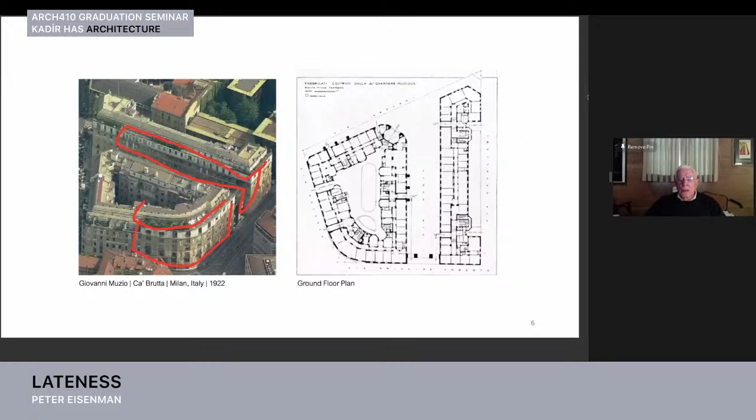Next, please. And here we can see it in context. It's really interesting - it is a perimeter block building. This is the part that Muzio did, and then he did across the street this rectilinear block. So we get a really interesting play between the rounded corner and the square corner, between a perimeter block and a linear block like the Uffizi in Florence. So two typologies on the facade, two typologies on the interior, and there is a really interesting play between these typologies and what I would call lateness today.

Next, please. So we started with a perimeter block.

This was the actual block that we had. We had a certain limitation in terms of height, and a certain limitation at the corner. We had to keep a building that was historically marked.

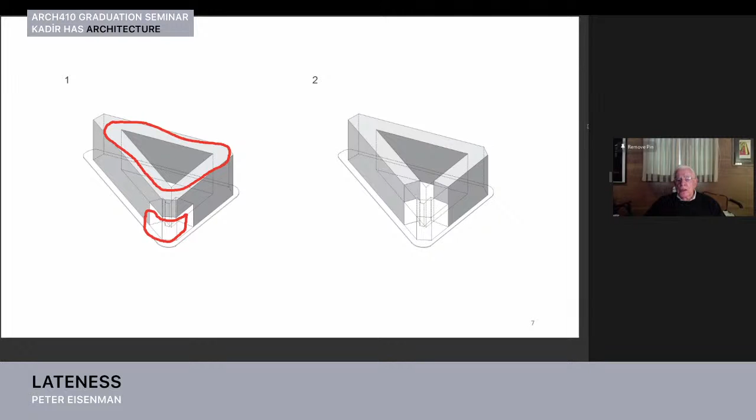This was the desired density that we had. The trouble is that we couldn't build this density because of certain zoning restrictions. So you will see how much we lost from this perimeter block, which I think is really interesting to see, how our project takes its shape from the existing zoning.

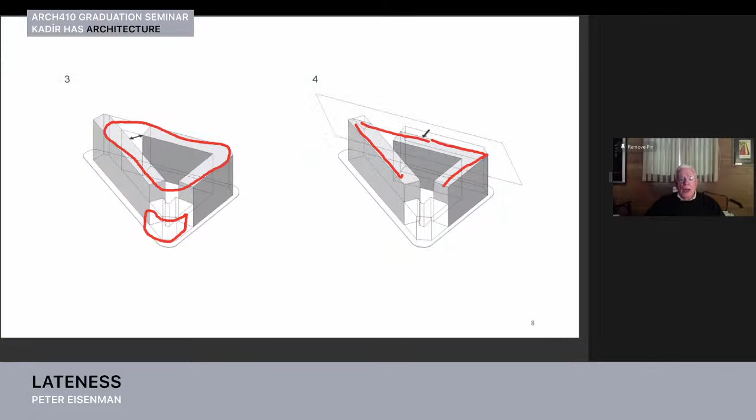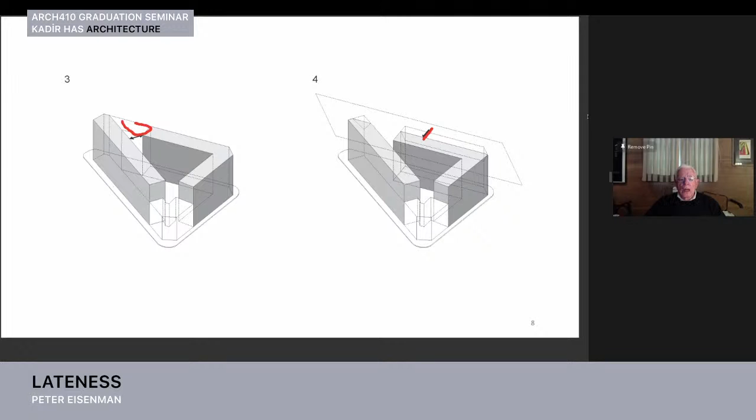So what happens is that we had to have a setback over here, so we lost some space here. As you see, the arrow pushes in. We couldn't be that close to the street, so we lost some material. And there was also the need to keep this distance here. So all of these things began to eat away and erode at the perimeter block.

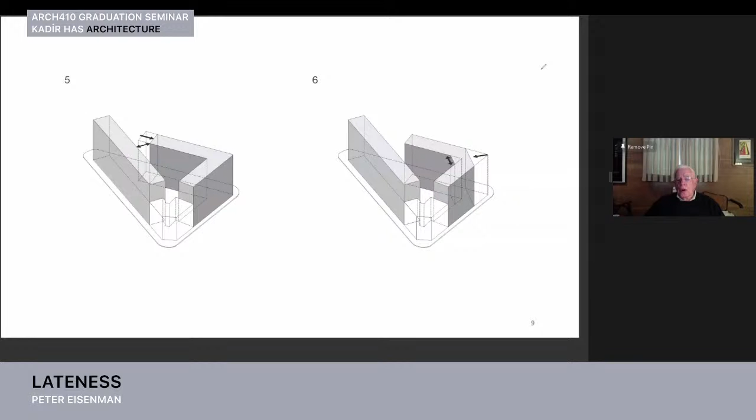And we see again the corner. First of all, we lost this amount to make sure that we had the distance between our blocks in the interior. And then we lost the corner because we couldn't build out to that corner. So this is what, so far, we had left from the original perimeter block.

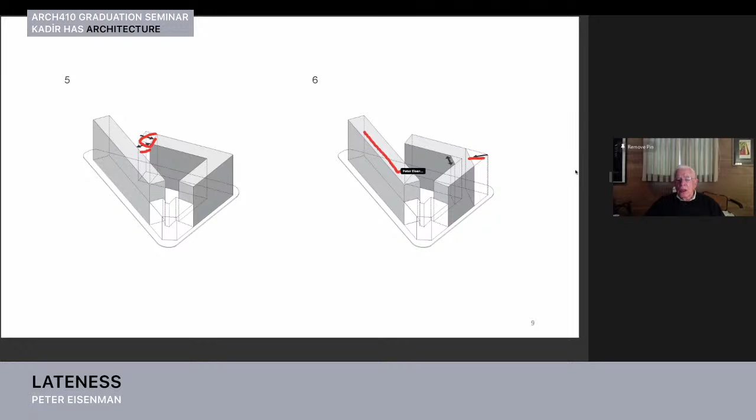It was a very simple idea then to connect them into one block with hard edges, and then, to take up the context of the Muzio, we softened those edges.

And there is the ultimate form of the building that we ended up with, which has a continuous curve situation. What's important to understand is in terms of environmental impact and global warming, we wanted a building with no corridors. In order to do that, we wanted cross ventilation so that each apartment had two exposures, and that there were no apartments that weren't accessed through an elevator.

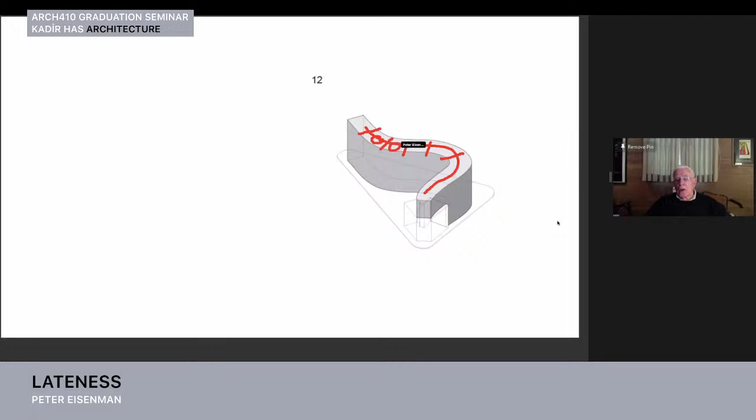So we had elevator cores, six of them on the building. We shifted slightly so there would be a front and a back of the building, which is a tradition in Italy. The front is different than the back.

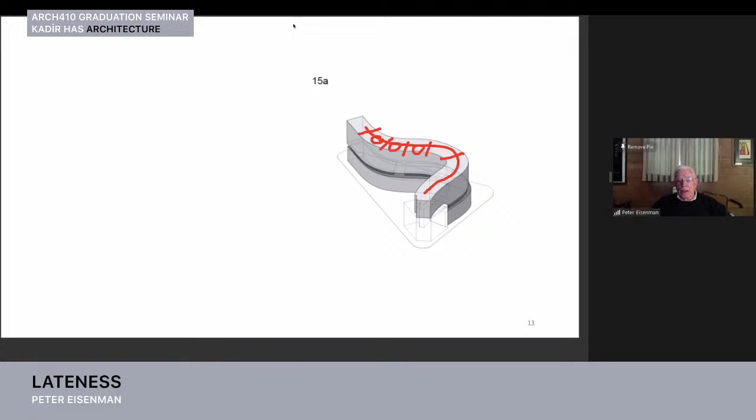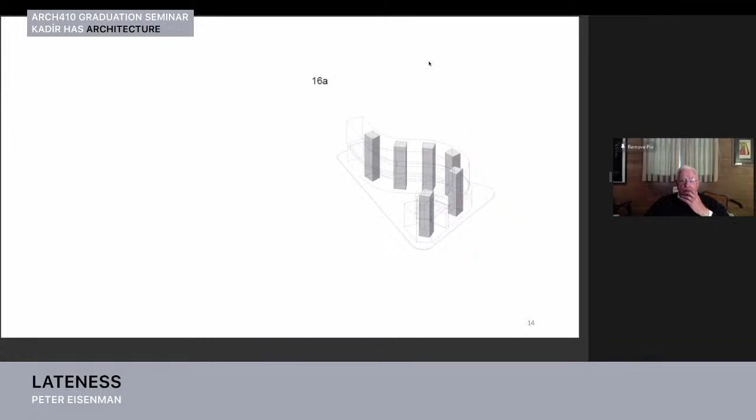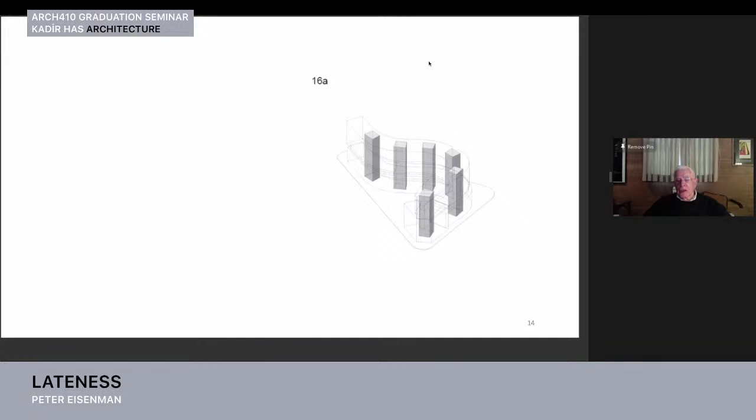And here are the elevator cores. With these elevator cores, every apartment faced onto an elevator core, and every apartment had cross ventilation so that there was really no need for air conditioning in the summer.

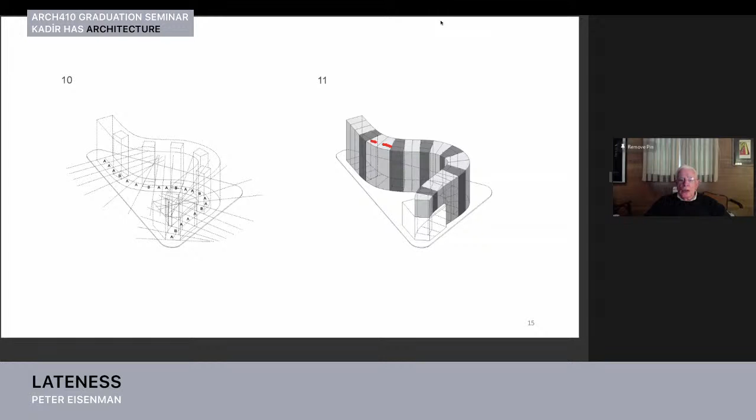And this is what it looked like, so that we had an elevator core servicing each of these two apartments. There was never more than two, or three if there was a studio apartment. So here is the formal rhythm that accrues, and here's the functional rhythm that accrues to the project.

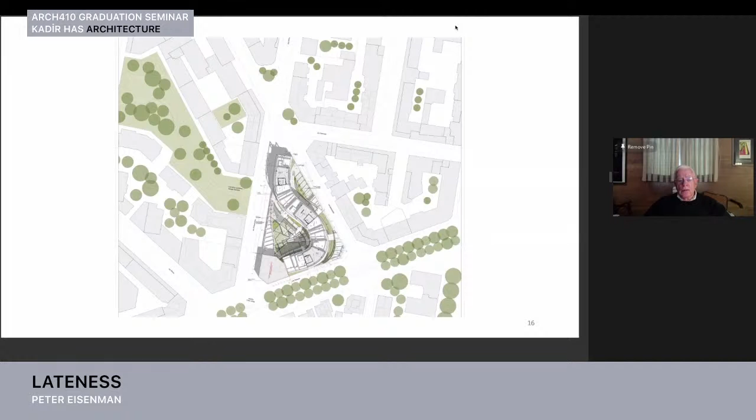And here is the building in its being, and you have to notice that there is a park here, which we were very conscious of trying to preserve a certain continuity with. And so you get this form, this projection into the project of this park area. So in terms of the context, the form relates very specifically to the open space that we found in the context.

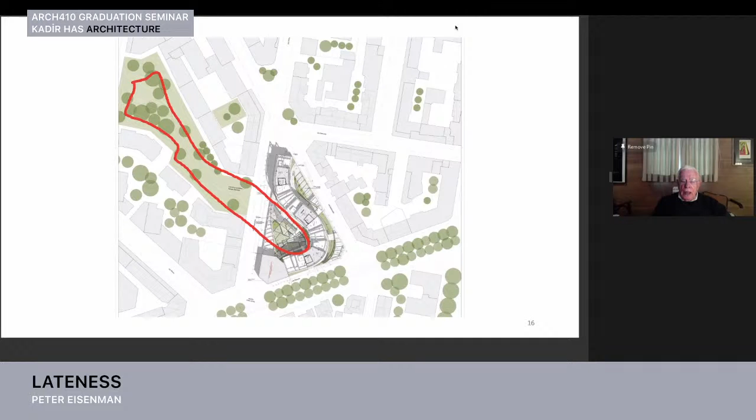And you see each apartment has a private balcony. So again, the open air is part of what's important. We have always on one side living, and on the other side bedrooms. And then that shifts, where we can have on the outboard side balconies and the bedrooms on the inboard side. So it shifts depending on the location of the form, the building mass on the site.

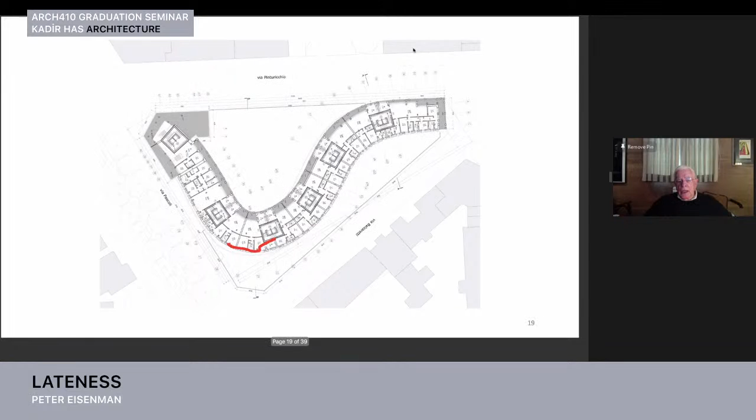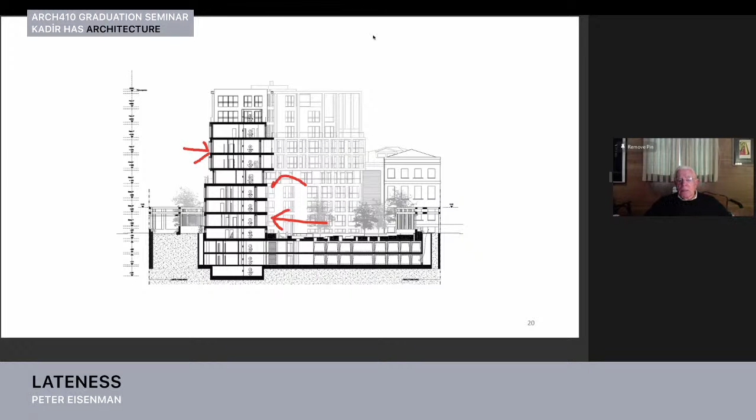And you can see the section. What was very important to us was the idea of this projection, so that the top is pressed in and the bottom is pressed out. So you get a difference in the facade relationship, the solid and void relationships, that the front in Italian architecture is also usually flat and the back is usually articulated. So we have rough and smooth, or flat and articulated, as part of the Italian typology.

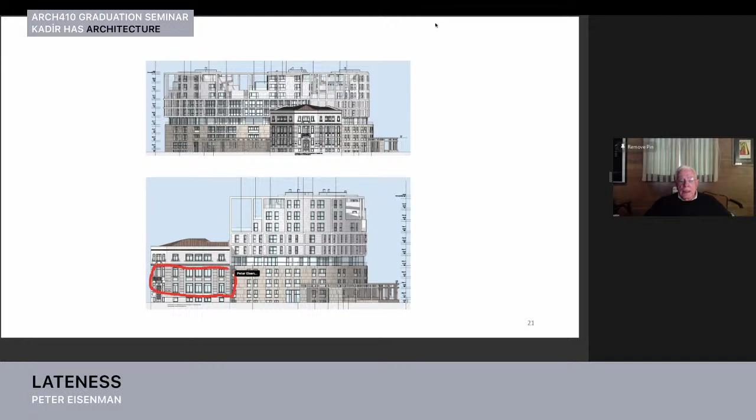And here you can see in drawing, here is the palazzo that we had to keep. Here it is, and the base is a Roman travertine base, which we also used in terms of material and color.

There's the piano nobile, which is here in this building, and here in our building. Then we have the attic story, and above that these two and three floor villas, which we call urban villas, which give you a sense of living in a townhouse on top of a palazzo.

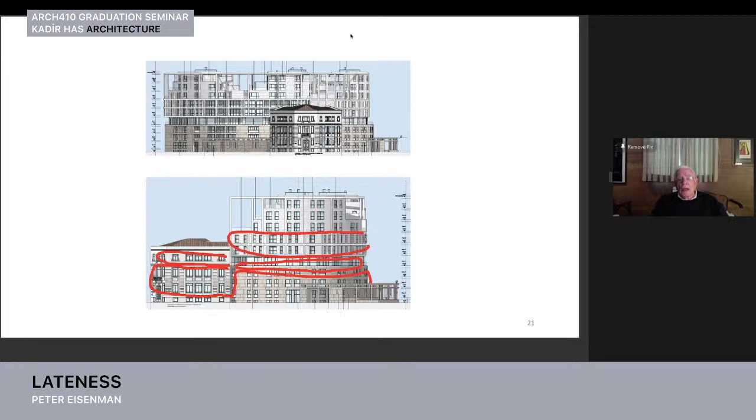So the idea of the building is really important, and the material and the openings all relate to what Muzio was doing in 1922. But what is different, why we are talking about lateness as what we call a hybrid between the old and the new, is that while we have the typology of a palazzo, an Italian palazzo, we have in the white frame elements the modern idea.

So you have on the upper level the framing of the elements, the material stone elements in steel and glass, and they are articulated. So the building is classical down below and modern up above, which creates this hybrid, which is the hallmark of what Muzio was doing in '22 and what a late project would be like.

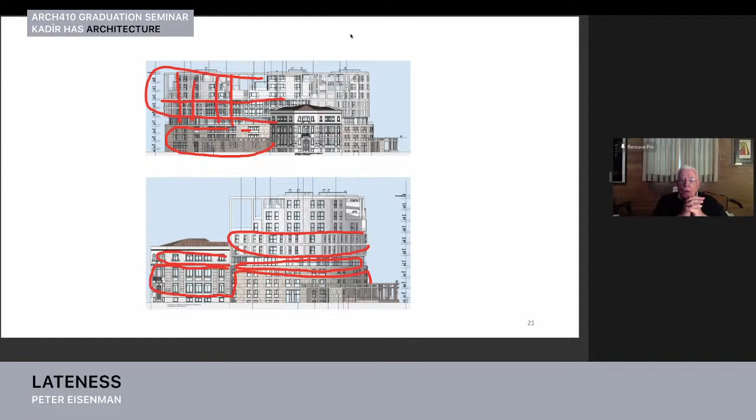That is the notion of hybridity, which is an important addition to how you can deploy lateness into the present by creating a hybrid structure. Next, please.

So the hybrid is clear, it's expressed, and it becomes an important aesthetic device for being called late, because a hybrid work cannot be either avant-garde or classical. It's part of both, so we have both parts that meld together in the project.

So again, subtle things make this building impossible to read as a single entity. It is a hybrid of separate parts, part of a typology, part of an aesthetic, part of a functioning building, part of an environmental concern, etc.

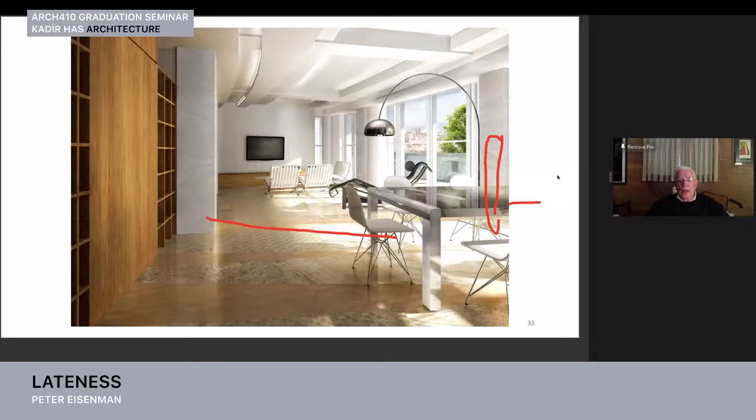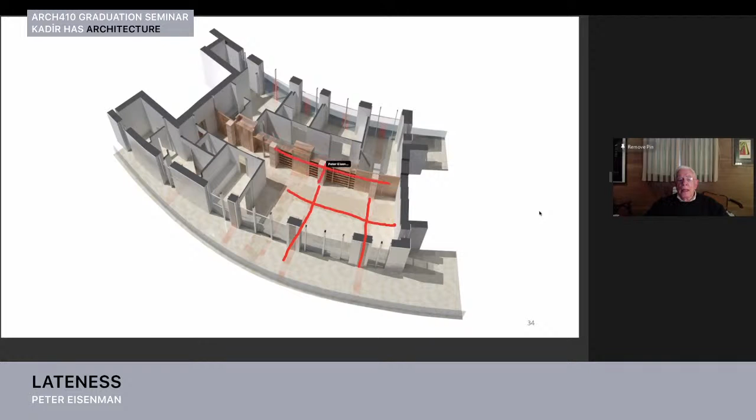And now, here is the right-hand side. You can see the storage wall, which is similar, the balcony, and Milan beyond. Next. And you see conceptually, you have the grid on the pavement, which you can see, and of course in here, the storage wall, which doesn't go all the way up, as you can see the columns go by it, and then the bedroom wing, as it were, behind.

So there's this tripartite relationship between a space out front, an intermediate space that gives a certain sound privacy, and then the private accommodations in the rear. And the kitchen element is tucked in the front of the space. Next, please.

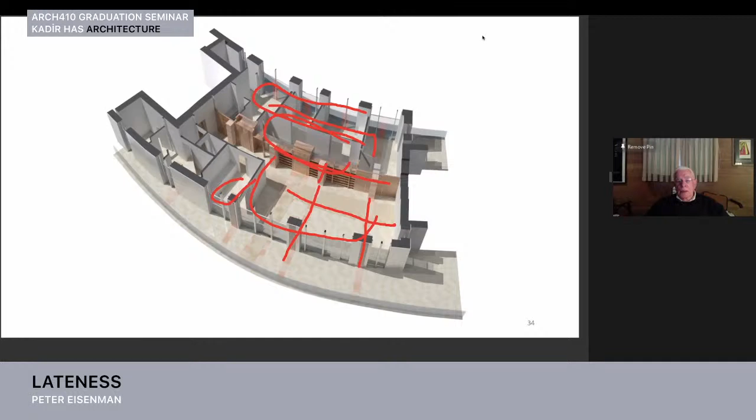Next. Next. I think that's it. One more or two more. Next. That it? Heard them? Okay.

I think it's too much to say that hybridity and lateness are equally manifest in this building. It's something that we were working on, developing the book Lateness, and the idea of hybridity, or what has been called a third space. And at the same time, we were operating on this building. There are several other projects that we have designed in the interim which take into account this idea much more fully than this building does. This was developed along with the book Lateness at the same time.